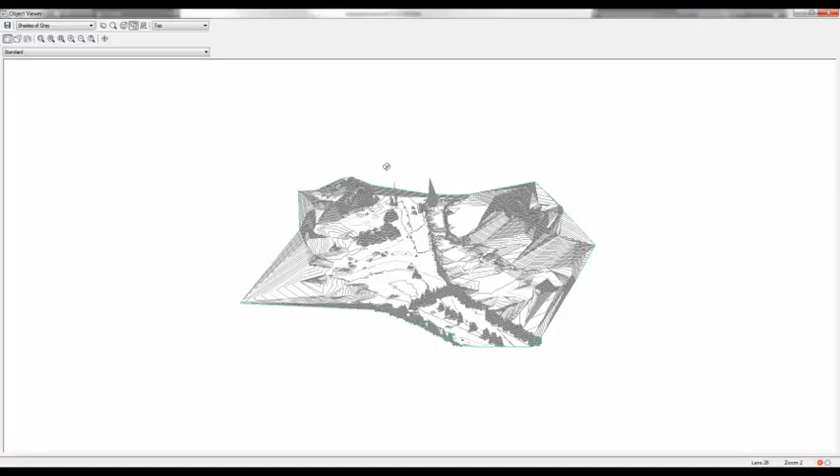Today I'd like to talk about one of the What's New features in AutoCAD Civil 3D 2016, surface creation from point cloud data. The Create Surface from Point Cloud command has been integrated and is now available in the user interface. This feature can be used to create a surface from one or several point clouds, selecting only the areas that you want to include and filtering out non-ground points so that they're not included in the resulting surface.

You can select areas of point clouds by using window selections, by defining polygonal areas, by selecting existing closed polylines inside the drawing, and the new feature also provides the ability to adjust the default distance between points in order to change the percentage of points that will be included in the surface.

So let's generate a surface from this point cloud or a piece of this point cloud, because again, we don't have to select the entire cloud. We can define it by a window. So I'm going to go to the Home tab in the ribbon, and I'm going to pick Create a Surface from Point Cloud. We're going to create two surfaces today. One will be filtered and one will be non-filtered, and I'll show you the difference.

So I'm going to go ahead and create a surface from a window. I'll just window out an area here. I'm going to go ahead and call this EG non-filter. So we won't apply a filter here, and I'll show you the result. So here's my style I'm going to use. I'm going to hit next. Again, I've already added the window area that I'd like to have.

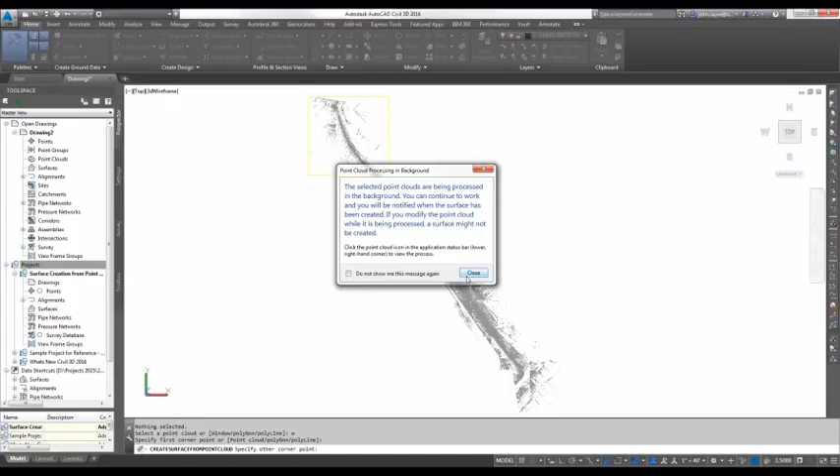I'll hit next. Now, the first surface, like I said a minute ago, we're gonna create as a no filter. So it's not gonna filter out any of the points. So we should be able to see anything that stands up vertically inside the point cloud, like a tree or car or some road signage or anything like that. So I'm gonna go ahead and select Create Surface, and it processes the surface in the background. I'll go ahead and hit Close, and it will tell me when it's done.

Okay, so down here in the lower right-hand corner, you're gonna get a balloon that says it's creating a surface. And you can see this is real time. It is done. It's created the surface. Now again, that was with 77,000 points. So what did it build?

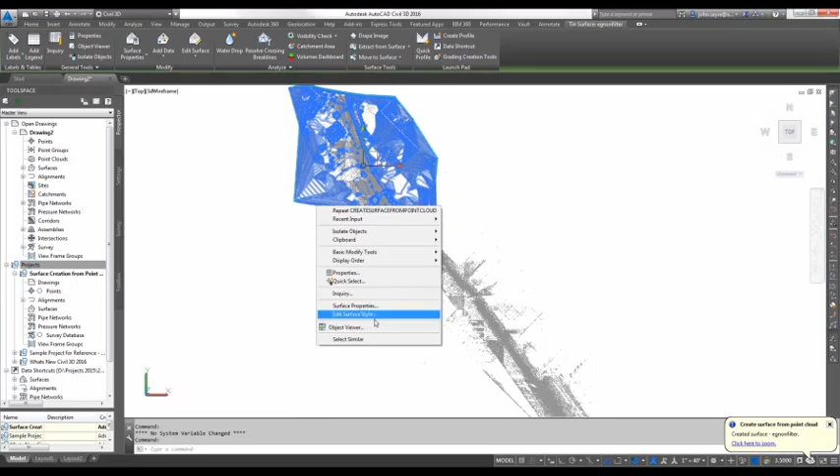All right, let's look. So if I zoom in here on the surface and I select the surface it created and I look at the object viewer, you're going to see that it's used all of those different points, the 77,000 points, like I said, and you're going to see a lot of entities that don't need to be there, like trees, road signs, anything that is sticking up in the air that we basically would not consider to be like a bare earth topo. So this is the no filtered surface.

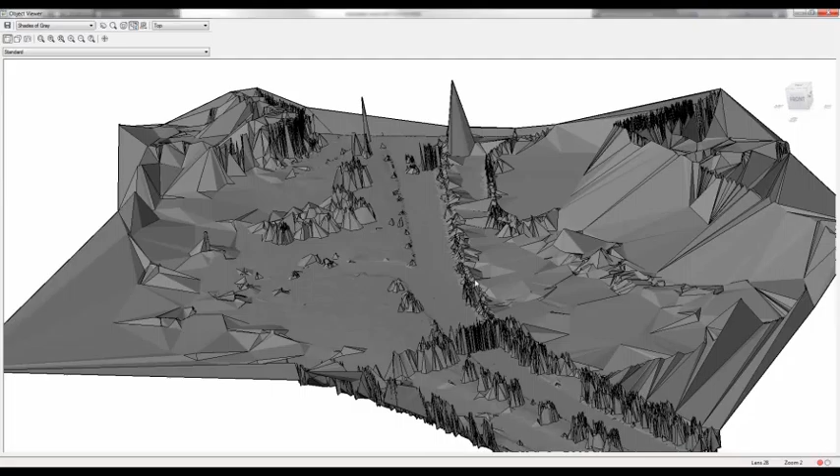Let's go ahead and filter another surface and see what it looks like. So I'm going to go ahead and turn it off. So I'll just go over here and I'll set it to a style that's no display. And I'll create another surface from my point cloud.

So I'm going to do it again. I'm going to use a window. I'm not going to pick the same area; I'm going to pick close to the same area. It goes ahead and selects. I'm going to call this one EG filter. And again, we'll give it the same style that we did before, and I'll go ahead and filter it the exact same way.

So before we had, again, I didn't pick exactly the same area. We could have. I could have actually told it right here I wanted to select a polygon or a polyline that was in the drawing, so we would have had the exact area that we would be working with for both surfaces. But it's about the same amount of points. So I'm just going to go ahead and select here, and I'm going to give it 2.

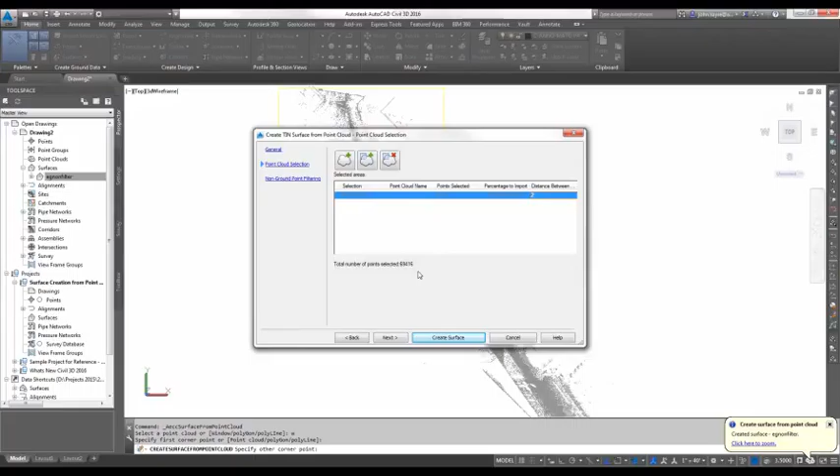Now, the total number of points before was 77,000. In this particular case, it's 69,000, and that's again because my selection varied just a little bit. Go ahead and hit next. We're going to go ahead and do a filter method of the kriging interpolation. As you can see from the image here, it's going to take out some of those points that might not necessarily be ground points.

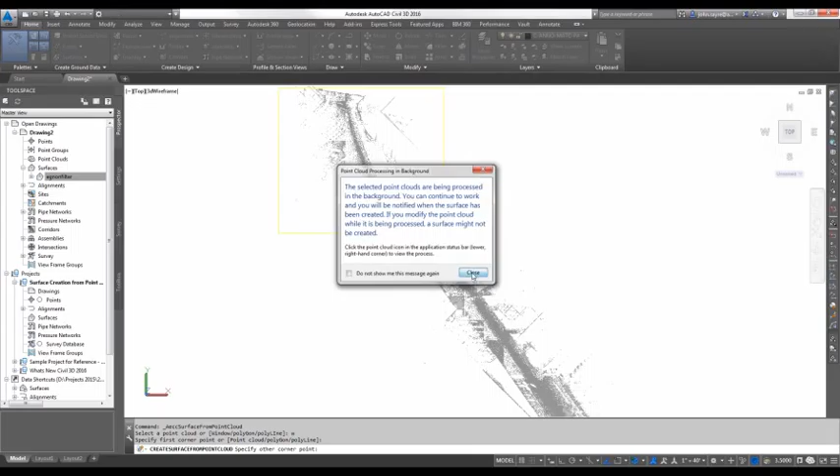Hit Create Surface, and we'll tell it to close because it's going to go ahead and create the surface. Again, your balloon comes up in the lower right-hand corner, and it does take just a little bit to generate this surface. And there you go, the surface is generated. You can see, create surface from point cloud. I can pick here, it says click here to zoom, and it'll zoom into that surface. And again, let's take a look at it 3D and see what it gave us.

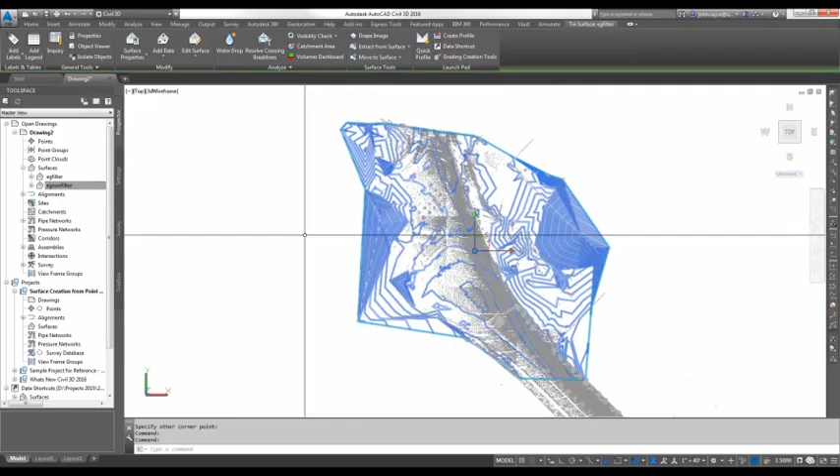So if I look at it in my object viewer, you can see this surface is going to be a little bit more palatable. It doesn't have the trees or any of the non-ground points, or most of the non-ground points. So you can see that the surface is actually smoother, and we can start to pull information from this surface. So again, think about LiDAR and think about point clouds that you have access to. We can generate surfaces very quickly from that. And again, we generated that surface from 69,000 points.

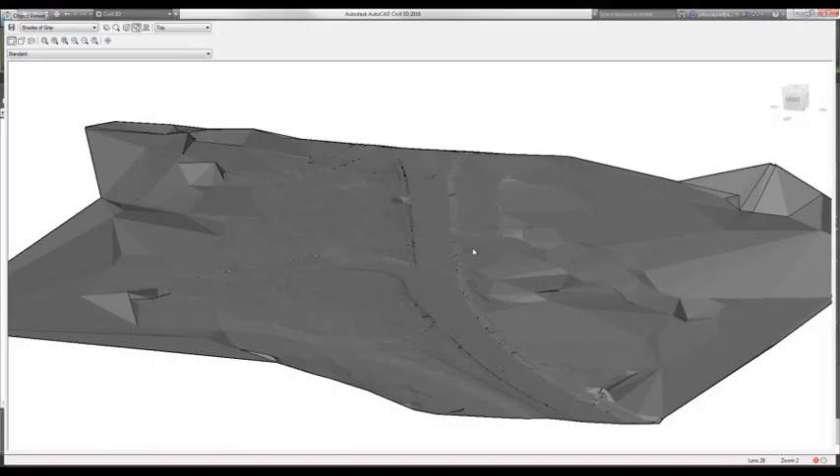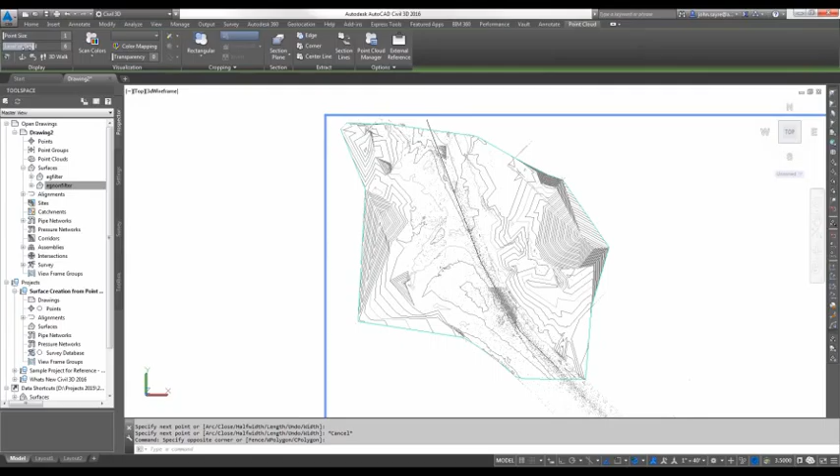So let's go ahead and pull an alignment and profile, or actually just do a quick profile. So I'll run a polyline underneath here. And again, you're not going to be able to see it just because the point cloud is sitting on top of it. But we have tools that we can fix that. So I can actually grab the point cloud here, and I could take my level of detail. Since it's built, I could take it down to about a 5. And then I'd be able to select my entity underneath.

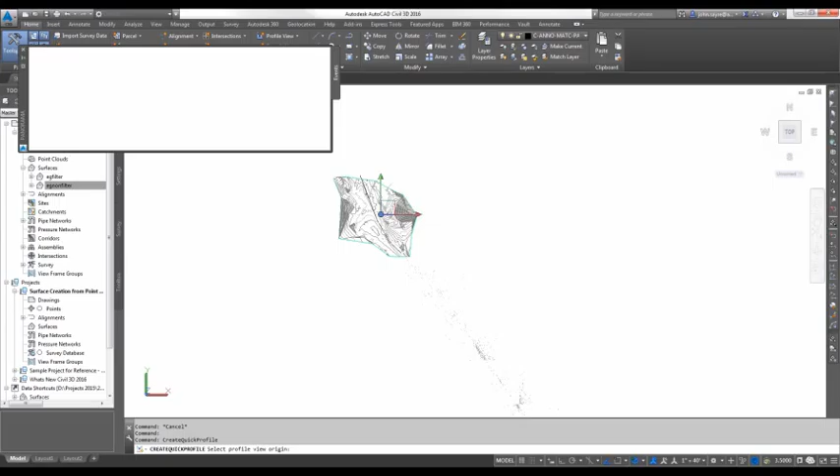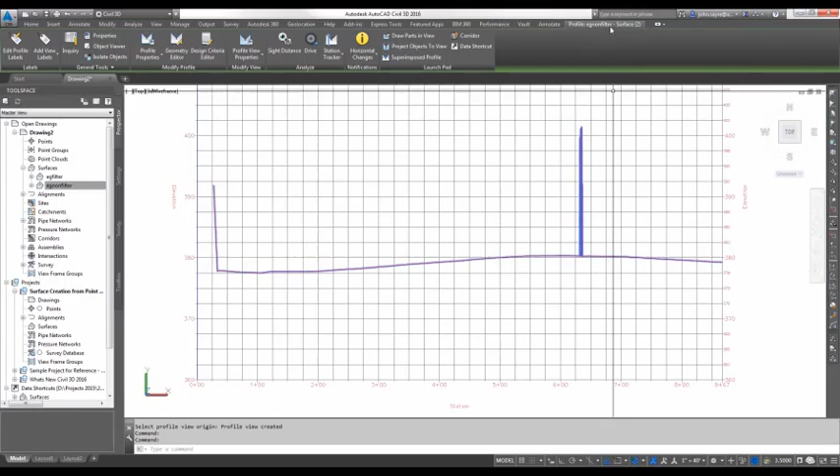So I'm going to grab that line and just show you in a quick profile. We'll go ahead and use both. I'll show both. Hit OK. Actually, I'm going to change to full grid. And here's a profile of both. So you can see in the profile view, I've got both of my surfaces in there. So there's the surface 2, which is the EG non-filter. All right, and directly underneath it would be EG filter. So you can see that it is picking up the different information in the two different surfaces.

So that easily we're able to create a surface from a point cloud and then quickly pull a profile view just to see what's going on in the area that we're looking at there.